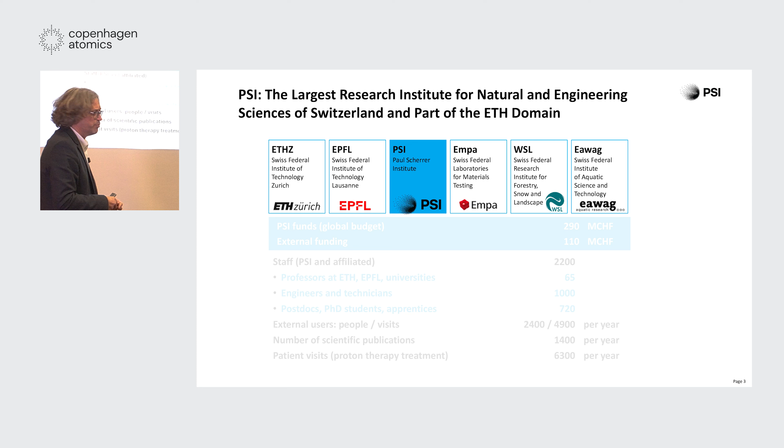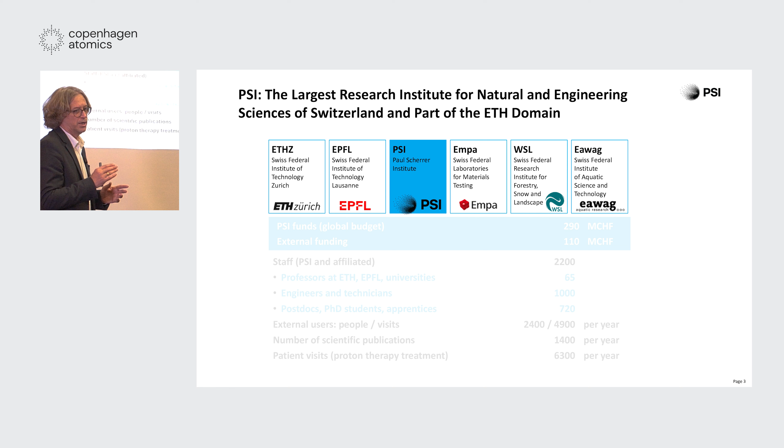When you look at the numbers, PSI, as of now, has around 2,200 employees. 65 of them are professors affiliated with universities for that link. And you see we have a very strong backbone of technicians and engineers, and that's important because we are running large facilities. And I think this is what these guys need. You will need many technicians for whatever is going to come in the future, and I think this is a nice match. We have decades of experience with large facilities of different kinds.

So like all these research centers, they have become kind of multi-mission labs. CERN is probably the one exception. CERN is basically dedicated to finding the origins of our universe, so to say, of our matter. But a typical research center like PSI or the American labs usually evolves around several missions. There's, of course, still a big part on fundamental research. But we also have future technologies, quantum computing, AI, you name it. I'm not going to speak much about that. Health innovation: we have radiopharmacy, we have proton therapy. So that's nuclear science in a wider sense.

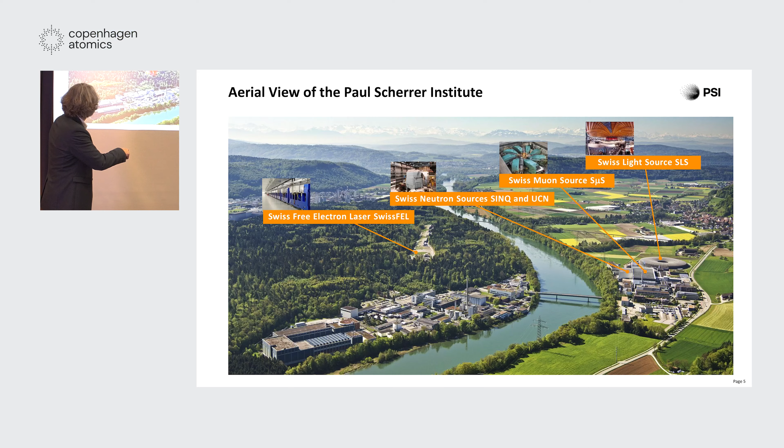So now this is PSI on a nice summer day. Not always like this. And one of the defining features is, of course, these 4 facilities. These are just big microscopes. The closer you want to look, the bigger the microscope gets. And our longest microscope is 800 meters long. That's here in the forest. It's a long accelerator that emits coherent X-rays, laser radiation. It's an X-ray laser with which we look deep into matter. And then we have other light sources. And the nice thing is PSI is, to my knowledge, the only place worldwide where we have all kinds of radiation. We have synchrotron radiation, so photons.

We have neutrons. We have a quite powerful neutron source, comparable flux-wise to a research reactor. We have a muon source, quite special, and we have our X-ray laser here. And these are really unique tools, and the combination is worldwide unique. Nobody else has that, to my knowledge.

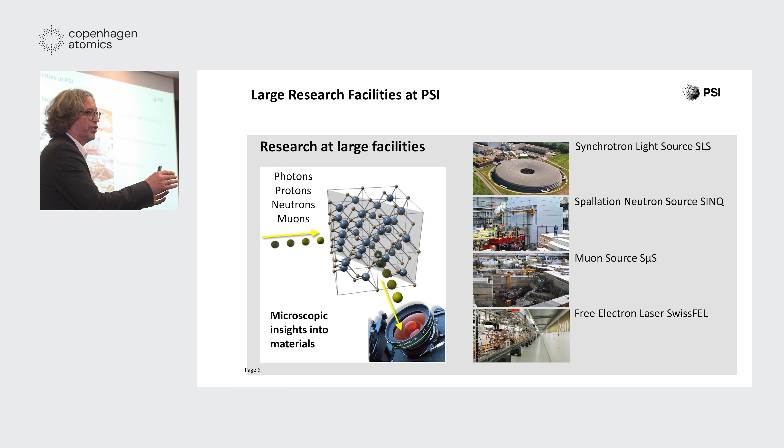And what we do with it is, of course, we are looking into everything from the macro scale. Neutrons are wonderful when you want to look into something that X-rays cannot penetrate. Right? You can basically monitor a car engine working because neutrons can shine through it and image what's happening inside. On the other length scale, we have nanometer scale.

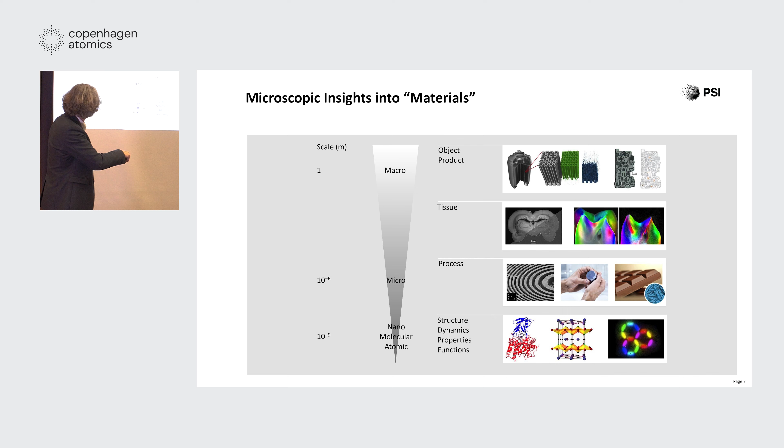And there, of course, we are talking about molecular biology and so on. But also here, structures on semiconductors. And just to have a few nice pictures, of course, I have to do that, right? This on the left-hand side is an Intel chip at a resolution of sub-nanometer. And you really can see these single conducting lines inside the microchip. So if you look for a Trojan that some company has put in there, you may find it. That's the hint, that's the background.

On the other side, you actually see a mouse brain as part of the Human Brain Project. And you see we are going here really into the far, far sub-nanometer scale. Quite impressive, I must say.

Now we are going back in history, 60 years back. It looked a bit different then, and so this is PSI in 1960, and of course this is where we come from. PSI was the nuclear research center of Switzerland. Of course it has evolved, and today it's only part of it, but back then PSI had the very first Swiss reactor, 1957, pool-type reactor, a nice Cherenkov glow inside, in that building here in red.

Then we built a prototype, 20, later on 30 megawatt thermal, so that's a third of what Copenhagen Atomics wants to build. I found a picture of the construction site I should have put in. It's a huge construction site. So it's quite impressive to see how these guys put it into a container while ours looked like a big power plant. It's a big hall, you can see that.

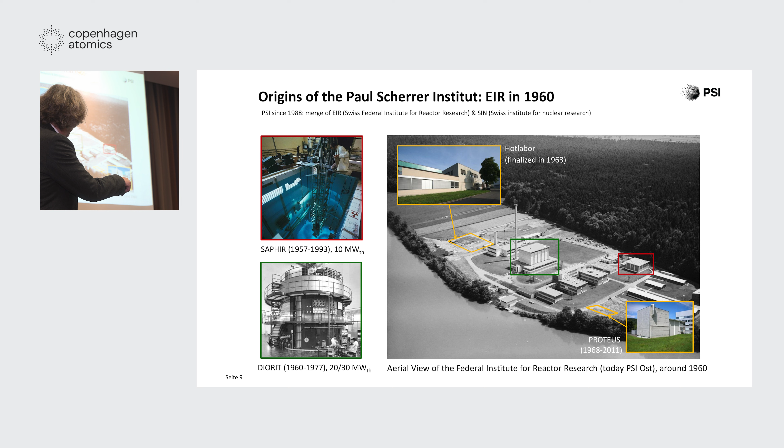And then we had a third reactor, a small research reactor, so we had 3 reactors on site, so nobody can say we have no experience. Downside to this, they're all shut down, right? The last one was shut down in 2011. As I said, we still have our facilities, and despite having moved more into photons and muon research, we still have a bunch of nuclear science on site.

I mean, we have the research reactors that are shut down. We have radioisotope production, that's of course nuclear related. Proton therapy is radiation, nothing else. So of course the methods and understanding are exactly the same as for nuclear power. We have the hot laboratory as mentioned. We have a large test facility for small modular reactors, radiopharmacy.

And here, this structure does not belong to us, but people may know what that is. It's the large intermediate storage for Swiss nuclear waste. That's for the power plants. That's where the spent fuel goes, and that is also where the decommissioning waste of the power plants goes. We also have a little facility here, and that is basically for all waste that does not come from power plants, but from elsewhere. Medical, industrial, as a matter of fact, mostly from PSI, because we are the biggest waste producers outside the power plants.

But waste conditioning, understanding how you condition waste for storage, is also part of our DNA. It's important. You want to minimize waste, but you also need to know how to handle nuclear waste. And that's something we are very good at. And I think, again, that's something where we match, because this is knowledge that we have in abundance.

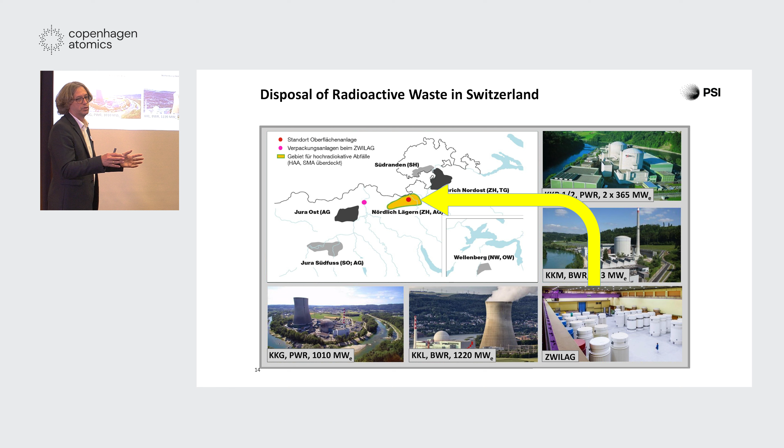And the Waste Management Association, NAGRA, will file its license request. And then in a few years, we will know whether it will be granted. And then we have a licensed site, and we can start designing and building our waste disposal. I don't think anything will go in there before 2050, but the construction will, of course, take time. But that's the situation in Switzerland.

I thought this is important also to understand where we stand now, how we match. Because, of course, that means we are operating our power plants for decades more, for possibly 2, maybe even 4 decades. And these power plants don't necessarily get better. Let's put it that way, right? There's material aging. Of course, you can backfit a lot, so you can replace almost everything, but not really everything.

So our nuclear authority, and you have not spoken much about licensing, but licensing is, of course, a huge deal, right? Licensing nuclear power plants is a bitch, you could say, to put it very bluntly, right? Many of these processes actually have been delayed, and we want to do it better, right? We want to understand how licensing works. We work very, very closely together with our nuclear authority.

So we are working with ENSI. ENSI is our nuclear regulator in the country. And we have decades of experience working with them in the oversight of the power plants. That's the one side of the medal. And we also have decades of experience working against them, because we have nuclear facilities ourselves. It puts us into a strange position that on the one hand we support them, on the other hand we are on the oversight side, so they are overseeing us.

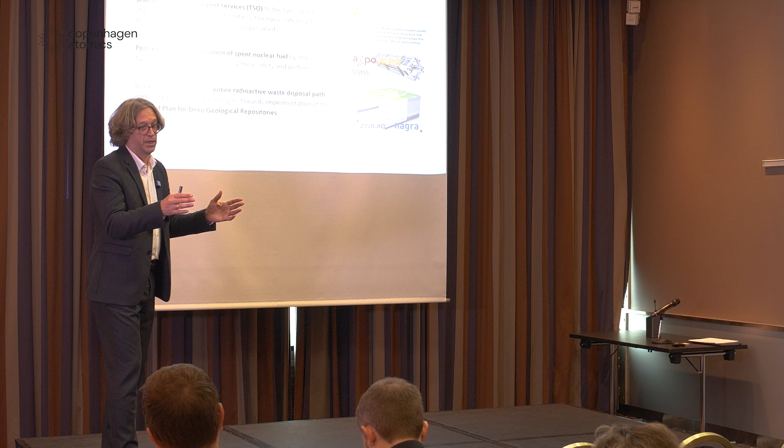And that's important. And so I think for us, it is also an interesting exercise because we haven't licensed a reactor in the last decades. For ENSI, it's an important exercise. For you, it is an important exercise, for us as well. And if you manage to demonstrate you can license a reactor with a Swiss regulator, I wouldn't say you have a free pass with other regulators, but at least in Europe, you stand a very good chance to get it passed with other regulators too. ENSI is very well networked with all other regulators in Europe. And I think if this works, it's a landmark in licensing.

Education is also important, right? Of course, for us, this project is so super interesting because it's attractive. We are doing something new. We are not working on our old clunkers, but we are actually working with new technology. And of course, our young people are super excited about the perspectives of working here.

We are part of this Generation 4 club, a membership that we have, not particularly active, but what we have established lately is that we have become more a contact point for other partners. For example, when it comes to Generation 3 reactors, we are working together with EDF, with Hitachi and Westinghouse, so we also have industrial experience. 50% of our budget comes from industry. So we also have the industry contacts, much more than any other place at PSI. I think that's also a strength. We are used to an industrial context much more than a normal division of a research laboratory.

Just as an interesting point, we are also looking at radionuclides. You will be producing radionuclides somehow. Whether that's an interesting business case is something to be looked at, but in principle, you could extract relevant nuclides from the salt. Who knows? It's perhaps a nice side business, maybe not at the center of your business right now, but of course it could be looked at.

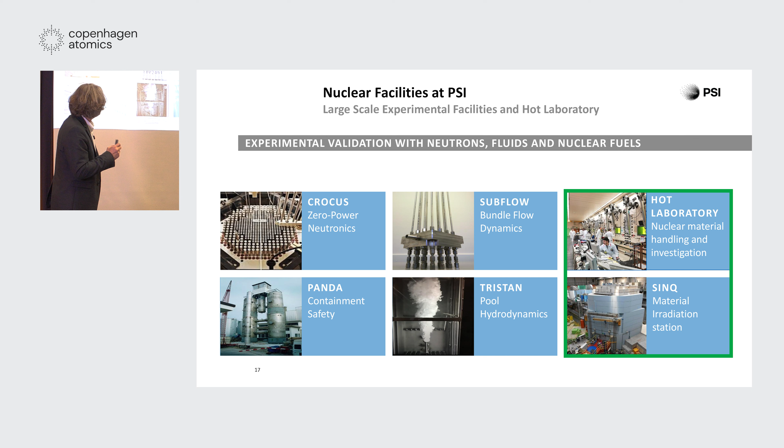When we look at our facilities, I just want to mention two facilities: our hot laboratory very briefly, and also the large neutron source. Our hot laboratory, as I said, is our oldest nuclear facility in Switzerland and is one of the very few laboratories in Europe, maybe a handful, where you really can work with highly radioactive material and with spent fuel from the power plants. So we get nuclear fuel rods from our Swiss power plants and investigate them. For routine reasons, that is just done on a standard basis.

If something goes wrong with a fuel rod, which doesn't happen often, fortunately, but it happens, these fuel rods come to us and we investigate what went wrong. And who else can do that? As I said, a handful of places in Europe. We are also looking at Generation 4 reactors. We get these fuel rods from our power plants, and the yellow color is on purpose. That's the view through a 70 centimeter thick lead shield glass, which shields the radiation.

And here you actually see the fuel rods coming in. And then we basically inspect them, and then we start cutting them down. We chop them in pieces, and we take smaller and smaller samples. And eventually our samples actually get on the micrometer size. We can cut samples from fuel that are micrometers big.

Why are we doing this? Because the smaller they get, the less radioactivity you have. And eventually the radioactivity of these samples gets so low that we can take them to our big microscopes and really investigate the structural details.

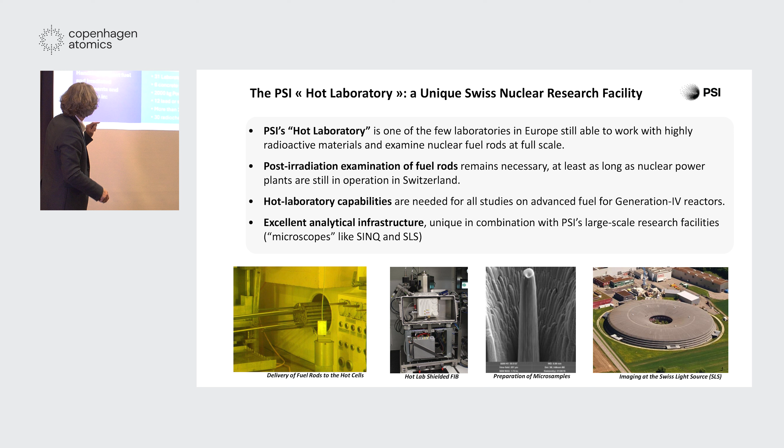And again, this chain coming from highly radioactive material that goes into the hot lab, cutting samples down so small that you can really take them in your pocket and walk away with them. Not quite, but almost, right? It's basically then taking them here to our microscopes for neutron imaging or for synchrotron light imaging, and then you really understand the structural details and you get really the full story, what went wrong with your fuels.

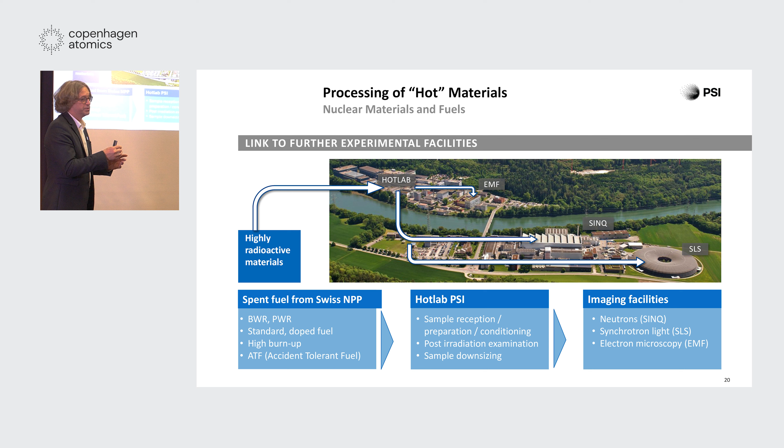Right, another nice thing that we have is this, our friendly monster here. If you think it is at CERN, it's actually the world's most powerful proton accelerator. It's not at CERN, it's at PSI. So you should know that. I think that's an important message, right? So it is not the highest in particle energy. When you look at the large ring at CERN, of course, the individual particle energy is orders of magnitude higher.

But what we have here is we have the highest current. So we have the most particles circling around in their protons. And if you look at it, actually, then it has the amazing beam current of 2.4 milliamps. It's not megaamps, it's milliamps. It's not much. But if it flies in vacuum, it's a lot.

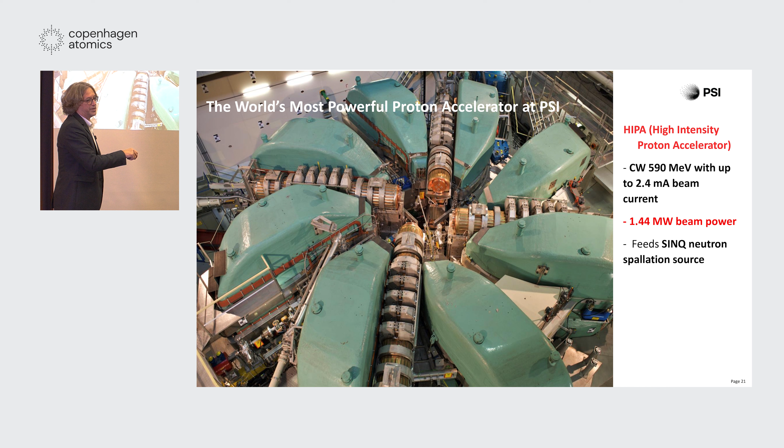And not many people manage that, to really accelerate particles to 600 megaelectron volt and have them circling here in this circle. The power of that beam is 1.44 megawatt. And that is a lot of power. And that power goes onto that small spot here of that size. So just imagine this small area and you put 1.44 megawatt, right? I mean, that's 10 strong car engines, the entire power focused onto one spot.

It's quite impressive. What we are doing with this is, we are focusing on this target, and then we are producing spallation. So we are producing neutrons. So the proton beam hits this target here from below, and then interacts here with these spallation materials. We use lead for most part. You can use other materials, tantalum and so on.

But that generates a wave of neutrons, and these neutrons we use also for imaging, but you can also use them for material investigations. And what we found is basically that if you put samples of materials in here, it could be structural samples from a molten salt reactor or other machines, we can actually irradiate them much faster than you would irradiate them in a power plant.

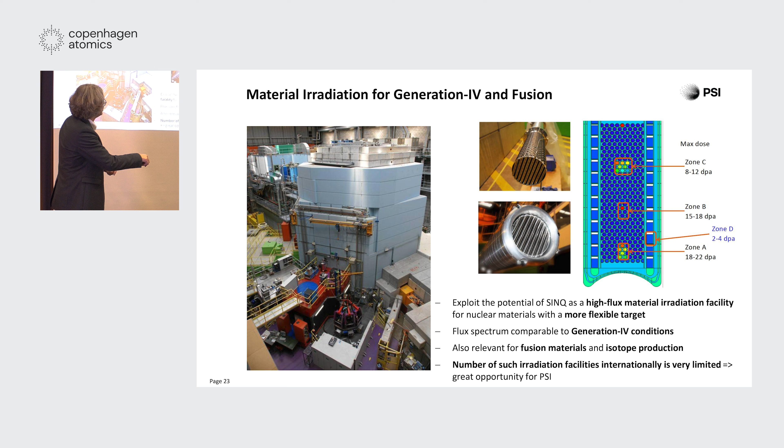So if you really have to qualify materials for radiation, and the question came earlier, right? So you need to prove that your material is radiation hard. You could do that also in this facility. Yeah, and you get much higher DPA. This is DPA, it means displacement. It means how much radiation these parts have seen. And so we can actually basically simulate radiation aging much quicker than in a nuclear power plant.

And that's interesting for new reactors. That's interesting for fusion, because fusion has that problem big time compared to what kind of radiation damage they have. That's for beginners, right? A fusion plant will see enormous radiation damage. That's the real elephant in the room. I do not know how fusion people will solve that material problem, I have to be honest.

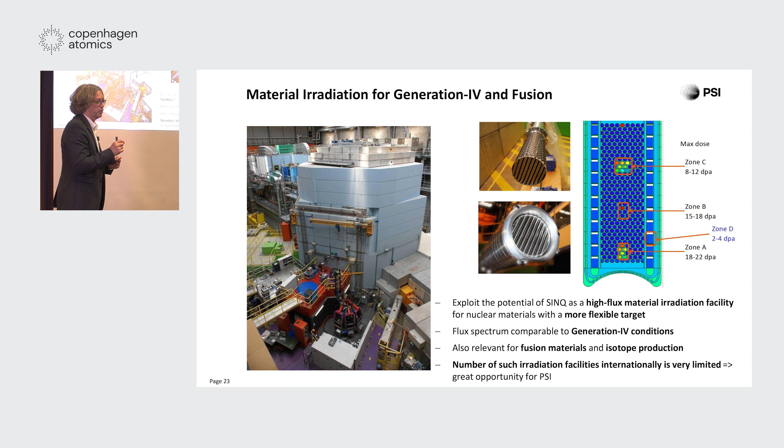And that brings me to Copenhagen Atomics, right? So now I guess you probably got a hunch why we think we are a good match, why this is complementary to each other, because these guys come with a great concept, I think. And I think we complement them with decades of nuclear knowledge, of radiation protection, of licensing specifically, and we think bringing this together is interesting for us. It makes for a good research story for us.

And of course, we also took a careful look at what we are doing, right? I mean, we are a federal research institute, so we have limited flexibility on what we are doing.

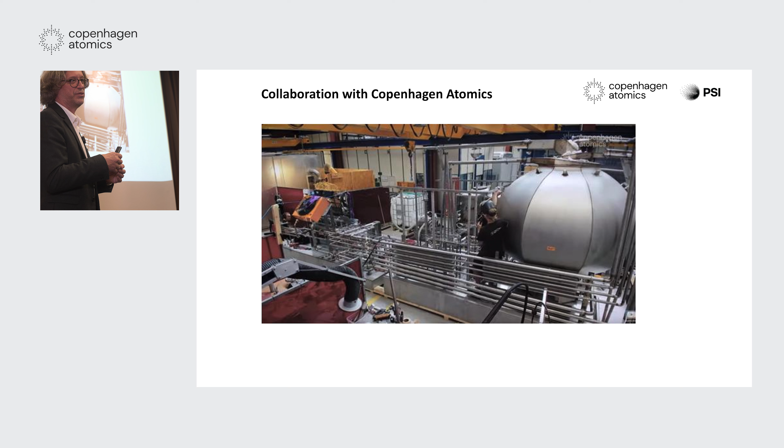And of course, I want to make sure I'm not running into an adventure where I cannot predict the outcome. So what I liked about Copenhagen Atomics is really, I think, these are the success factors that we have seen. Of course, we have visited Copenhagen Atomics. We had a lot of technical discussions already. We see there's a young, motivated team. We see there's a production facility, so it's not just paper, because many of these startups are just paper concepts. Here we really see something happening, and that's impressive, I must say.

What we are bringing into it is, of course, I mean, I also like the similarity in the flags, right? I thought I'd just play that little catch here with the Swiss and Danish flag.

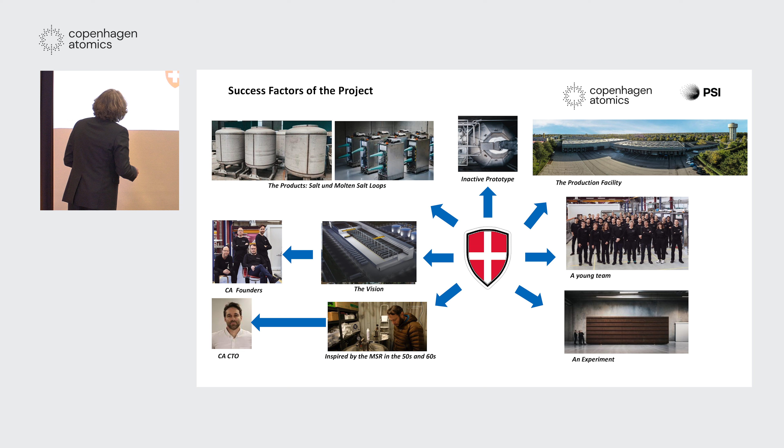So one of the team members here was the head of the last research reactor we have in Switzerland, Pavel, sitting in the back. So if you want to learn about Swiss research reactors, he is here. We have Marco, who is head of the hot laboratory today, who was also in charge of a licensing project for a nuclear power plant in Switzerland before Fukushima, because we had plans to build, right? Before Fukushima, Switzerland wanted to start replacing their nuclear power plants. And so there's a lot of experience from there.

For our hot laboratory, because it's 60 years old, we also had to renew our license. So again, it's about licensing. How do you deal with licensing a 60-year-old facility according to new Swiss regulations? Not trivial. It took us quite a bit of time, but a steep learning curve, very helpful also for this project. The same with the equipment that went in there. Recently, we started a waste processing utility at PSI again. So we keep on licensing and challenging our regulator, and that's also how we learn.

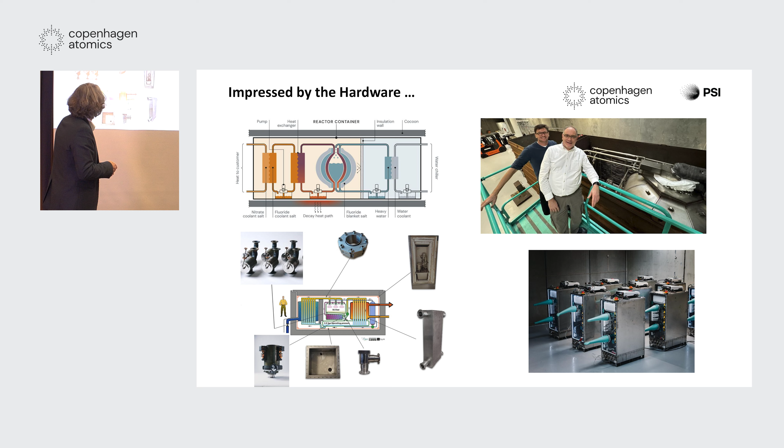We signed our contract on the 1st of July, and then we are anticipating, as you have seen, the big steel cask with content eventually. Just to say, we were impressed by the hardware, but you have seen all the pictures, so I'm not repeating this. But you see the colleagues have been there and seem to be very happy about what they saw. For me, more important is what we will start with, because we are so careful in Switzerland, right? Nuclear safety is a non-negotiable value in this country.

We have a site located on the PSI premises, and because we really want to make sure of what we are doing, we will even put another shell, a big airplane-crash-safe shell, around this container to really make sure that nothing happens. Nothing will ever happen, but we really want to be super sure, and this will be very convincing to our regulators that even in the worst case of a complete airplane crash on that facility, nothing will ever happen. And that's what we want to ensure.

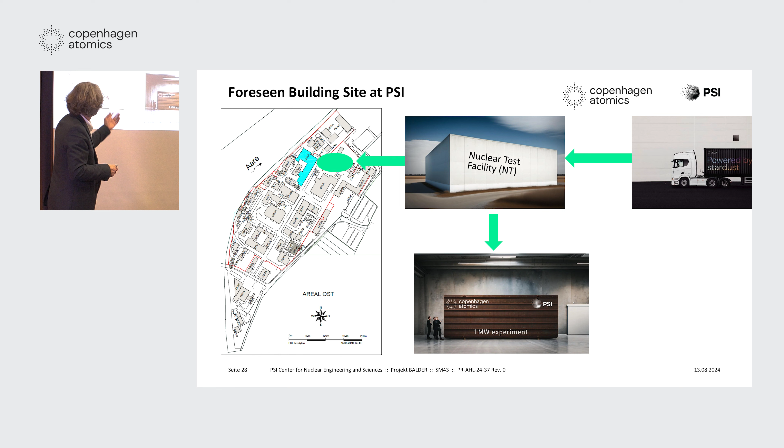So that is basically a big hall that comes here. Not that big, but it will be bigger than the container for sure. And then eventually the container will come with all its parts, and it will likely look like this, and then we will start our experimental campaign. I will not speak about this, it just gives you a hunch of the licensing process. I'm not even going to touch it because it is complicated. But it gives you an idea how many steps of licensing are involved, and that's maybe for the lunch break, or maybe not. You decide.

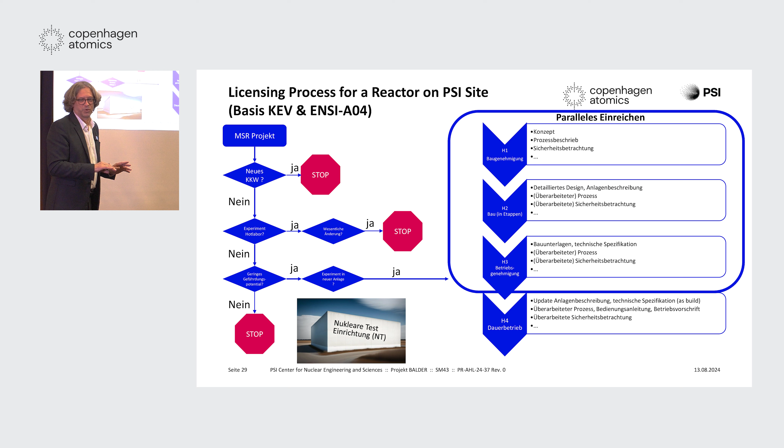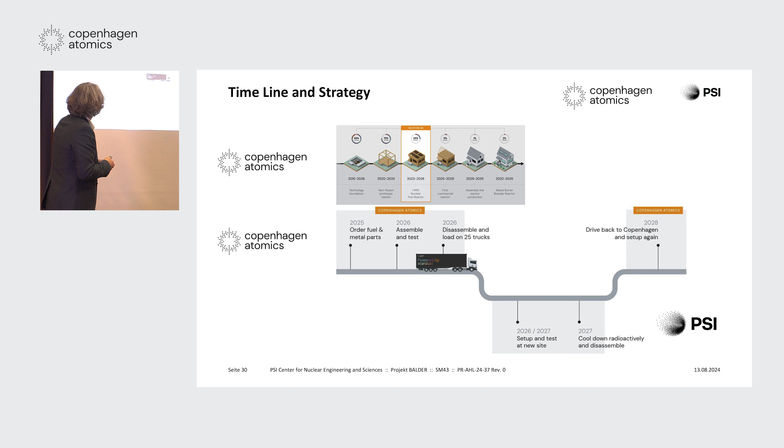You have seen our timeline. It's ambitious, but I think doable. And we are starting our topical discussions with the regulator these days. So we are now entering the technical phase, where we try to start sorting out the details of how we are going to proceed to have a swift licensing. And if everything goes right, then this will come true. And for me, it's an exciting journey, I must say.

And it's new. You know, I've been here now for 13 years, and for a decade, I have only done old power plants. And if this works out, it's quite a nice story for Switzerland, for nuclear research there, and of course for Copenhagen Atomics. Yeah, and I think that's all I want to say.